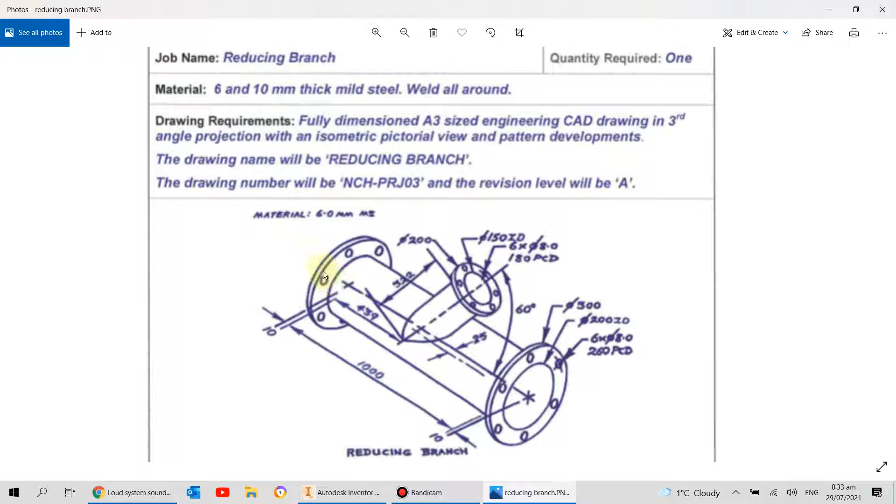And we have a little bit of an offset here of 25. So the way I'm going to start with this one, same as always, new sheet metal.

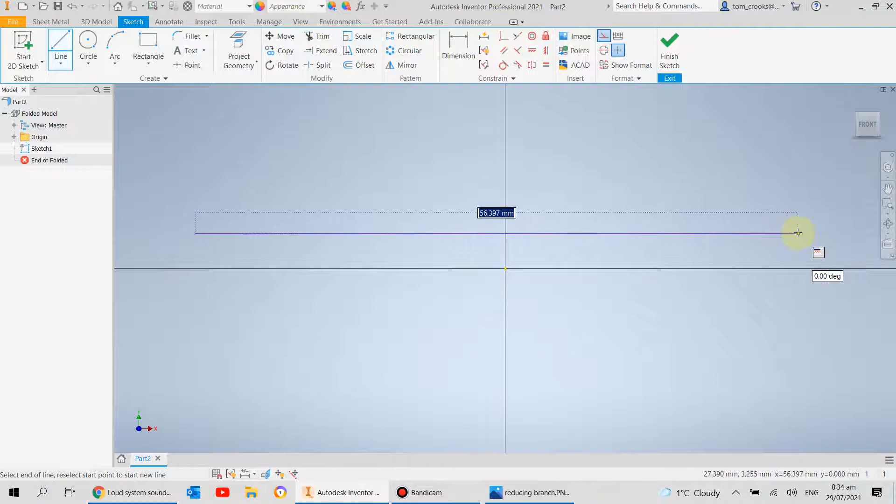I'm going to start a sketch and just draw a side profile of it out of construction lines. So I'll turn on construction line there and just draw a line here. I'm going to make sure it's vertical, and make sure it's horizontal to the origin point there.

Now I'm going to give it a length of 1,000, and I am also going to draw a line either side like this, and I'm just using this so I can do my planes off of them. I'm just going to make sure that construction lines are joined horizontally and vertically.

So you can see that's constrained to the middle there, it's gone black, and I'll just make sure this one's doing its job too. Yep. Now I'm just going to make these equal because they are the same size. And there's a basic side view - that's just the main length, and imagine an axis going up and down here.

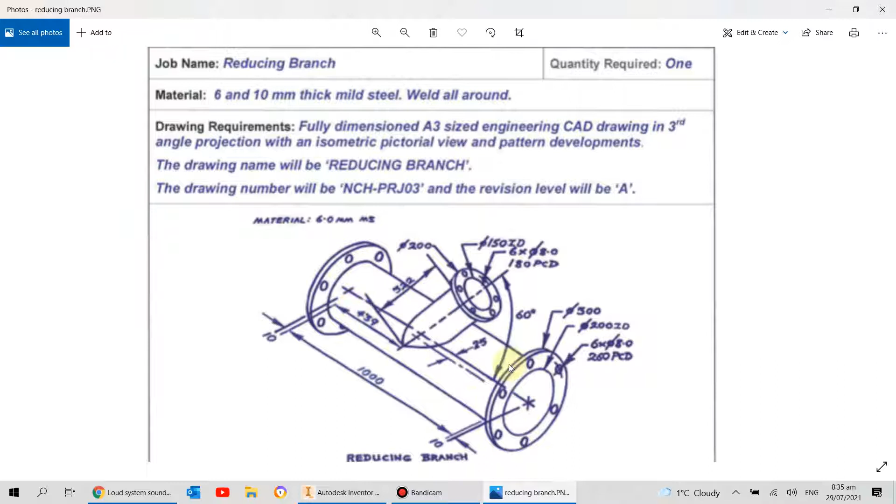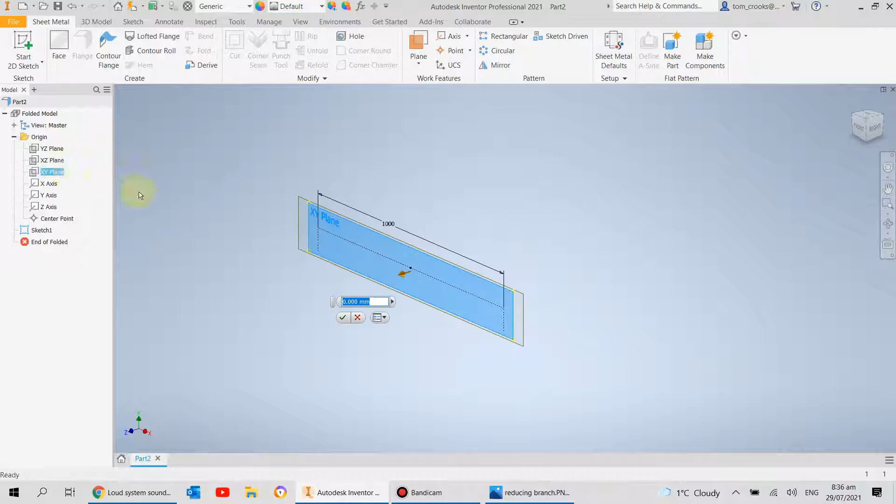Now I'm going to come off of that one a wee bit and make a new plane 25mm off the old one. So I'll go to new plane, offset from plane, find the one I drew on, that one there, 25mm.

Now I'm going to start a sketch on this, and I am going to project some of these geometries onto this face, so that one and that one. And we can see from the picture we've got a 60 degrees center line to center line, and the start is 439 off the end. So I will do a 60-degree line.

I'll just guess it for now - 439 it says, and 60 degrees. And we'll have another quick look at that, and the length we've got is 522. So we'll go 522.

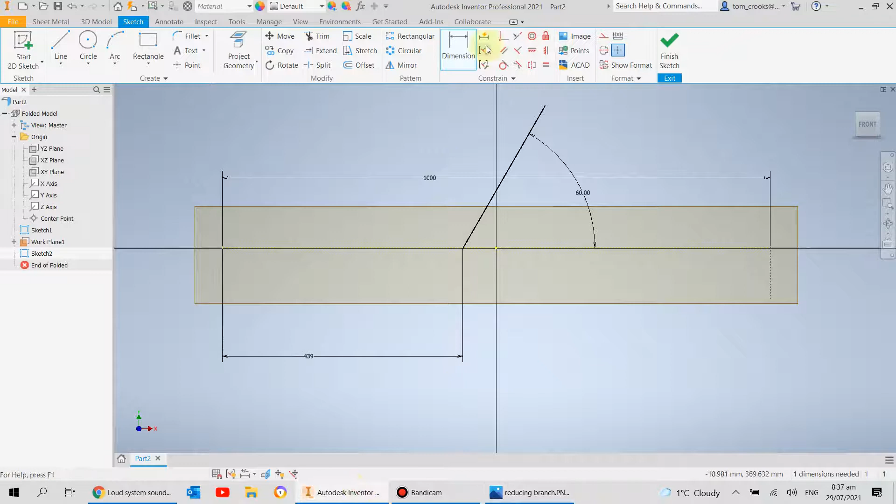Alright, and I can see I've drawn it as a solid line. I just want that as a center line, as a construction line. So what I'm going to do is click on it and just highlight the construction line there.

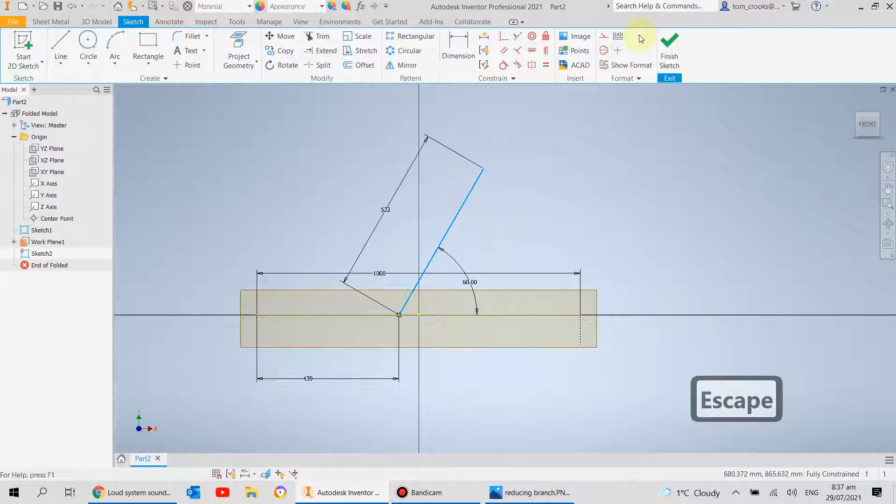And the next thing I'm going to do is draw a line across for the end of it here. And I'm going to constrain that to there. I'm going to make sure it's perpendicular to this one. And I'm going to dimension it as well. So I'll just check what dimension we had there - we had a 150 ID. So I'll just go with the ID.

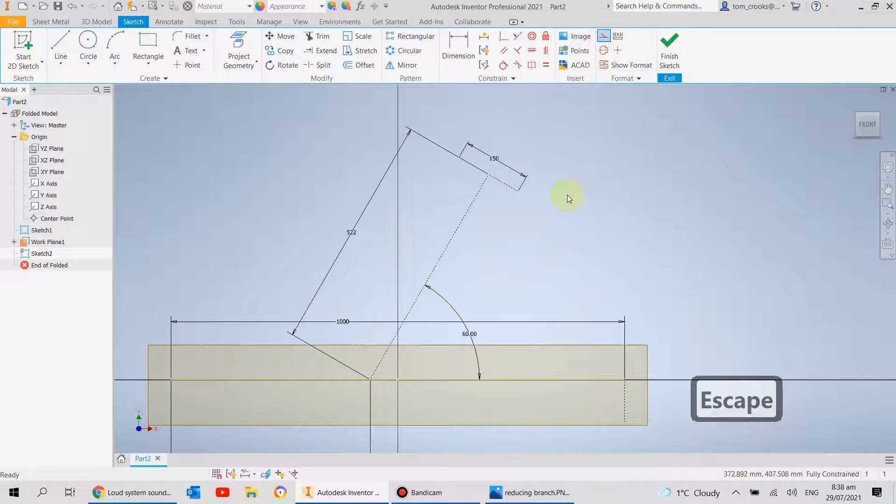And I've done the same thing again. I forgot to turn construction line on, so I'll just change that to construction. And there we go. So now I can build all my faces in the correct way.

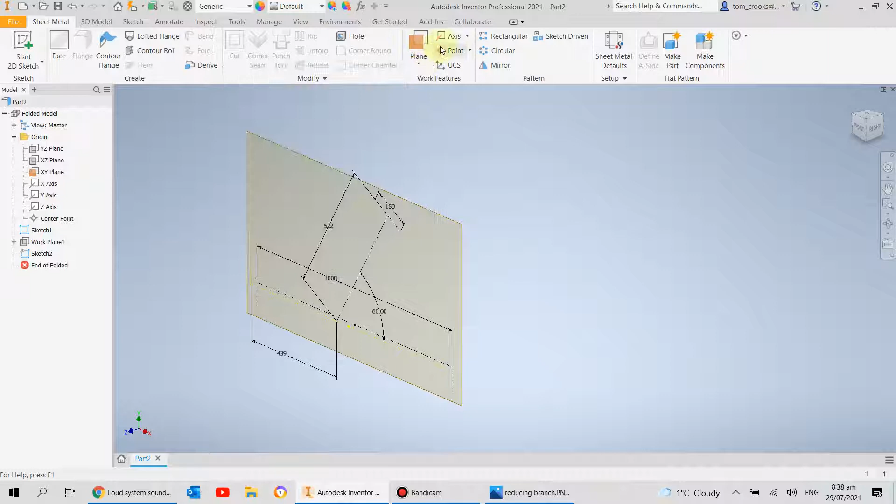So I'm going to turn this work plane off, and I'm going to turn the original one back on. So what I'm going to do here is just make a bunch of planes perpendicular to where I need, so I can draw on them. I'm just going to also make a few points, just to make my life a bit easier.

These may or may not come in handy. I may not use all of them, but it's always handy to have them there just in case I do need them.

One more thing I'm actually going to do - I've just realised I've forgotten to do it. I'm going to go back to that second sketch I did, and I'm going to edit that. And I'm just going to draw a construction line along the bottom as well. And I'll make sure that's constrained to the center, to the end of that line, center to the end. And I'll make sure it's equal to the top one. And I'll also just have a look, see what's going on there. And it must be parallel to that end one as well.

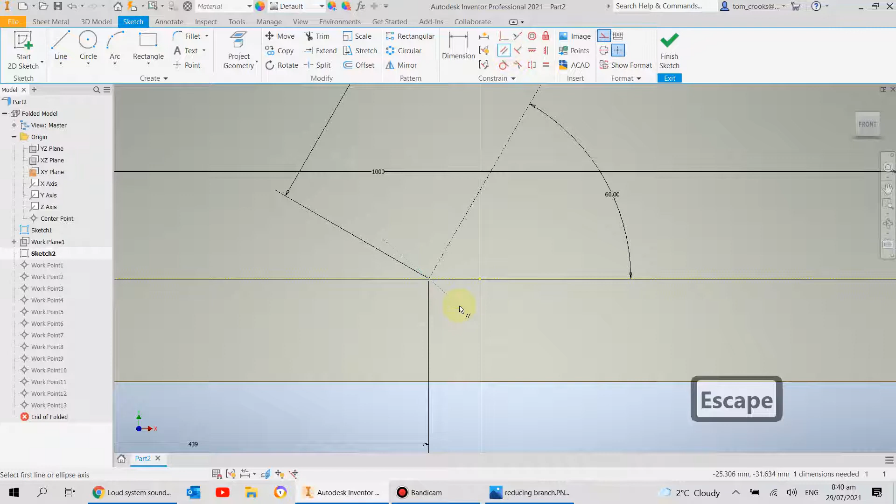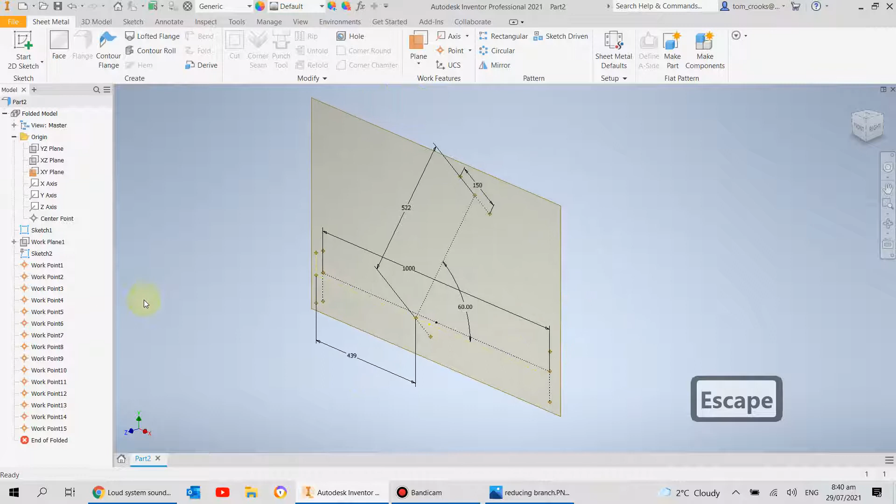Now I'll do a couple more points there just to make it easier when I need to do the other drawings. Right, I will turn off the plane here.

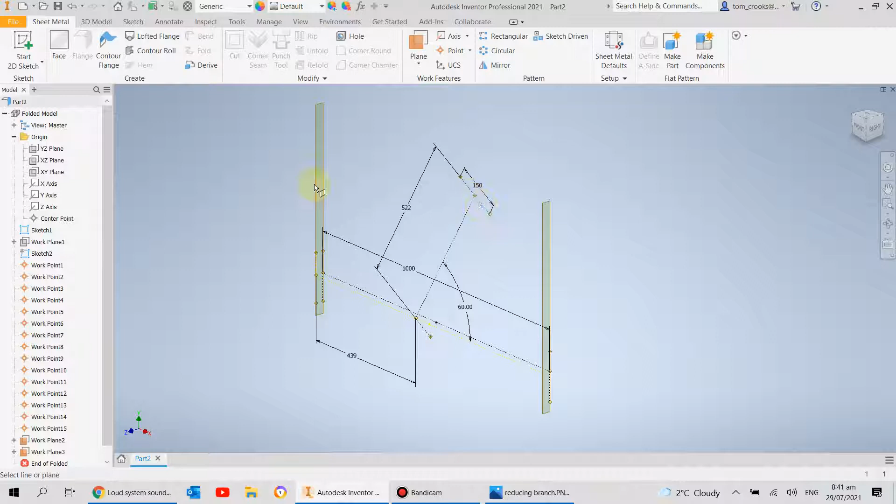Now I'm going to do a bunch of perpendicular planes, so I'm going to draw my faces on everything. So angle to plane around edge - I'm going to call that the edge. And angle to this plane, it should go 90 degrees automatically, which is great. Same again. Same again. And one more.

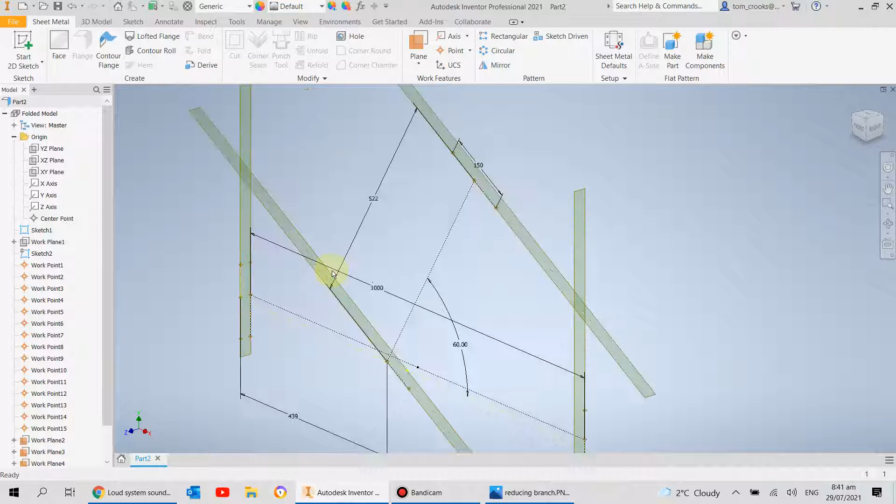So now I have all my planes that I'm going to need. What I'm going to do is draw circles on them. So I'll start a sketch up here, and I'll just rotate it a little bit, and I'll just project the geometry. So I'll project these points here, do a circle, and it's all gone black, so it's all constrained. Finish that sketch.

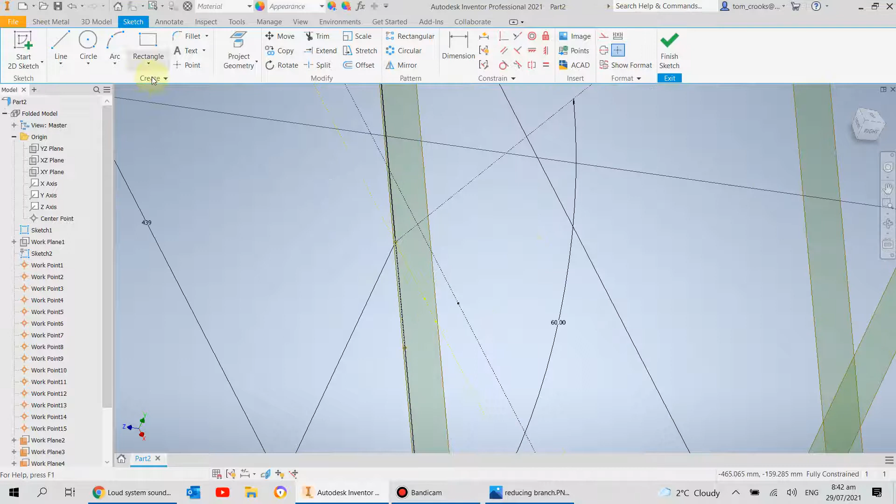I'll start a sketch on this one, and I'll just rotate it out the way a little bit. Same thing again, project the geometry. And there should be a line up here somewhere. There it is.

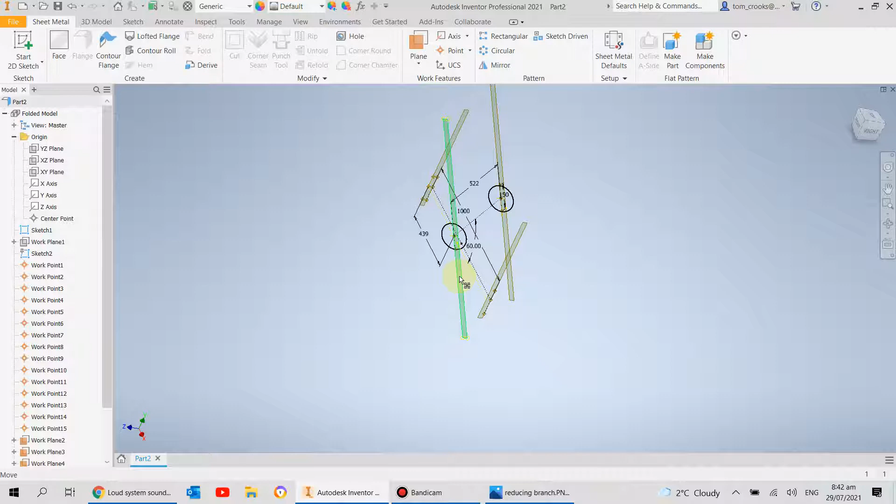So we had that's a 150 ID, that pipe that's coming off the side, and the other one is a 200 ID. So let me just do this, make sure we're getting everything right. Just rotate around a little bit. Same thing again. Project the center. Project either point, either end of that line there. And something doesn't quite look right about that.

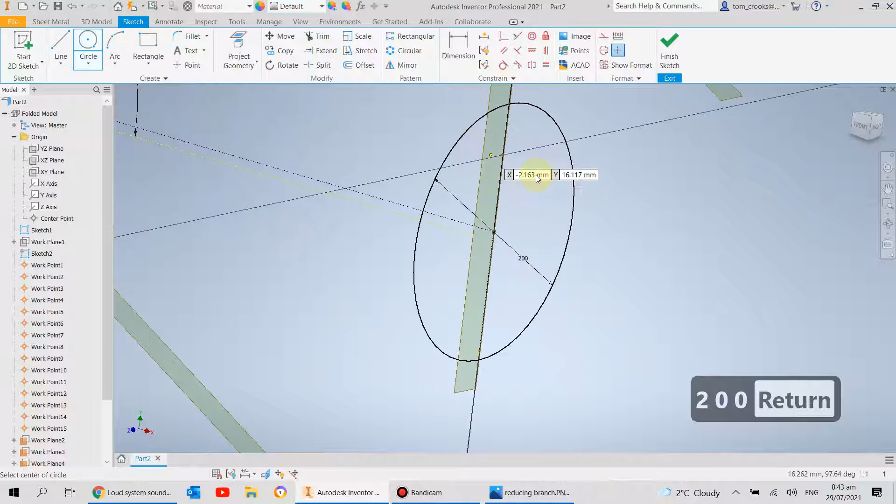I'm not too sure, but what I can do is I'll just draw a circle and give it a size. So we had 200, so this is all ID on the side. That's worked fine. For some reason this line isn't exactly where I was expecting it, but as long as the center's in the right place, that's good. And it must be, yep, so it's meeting there. I'll finish that sketch and I'll do one last sketch over here.

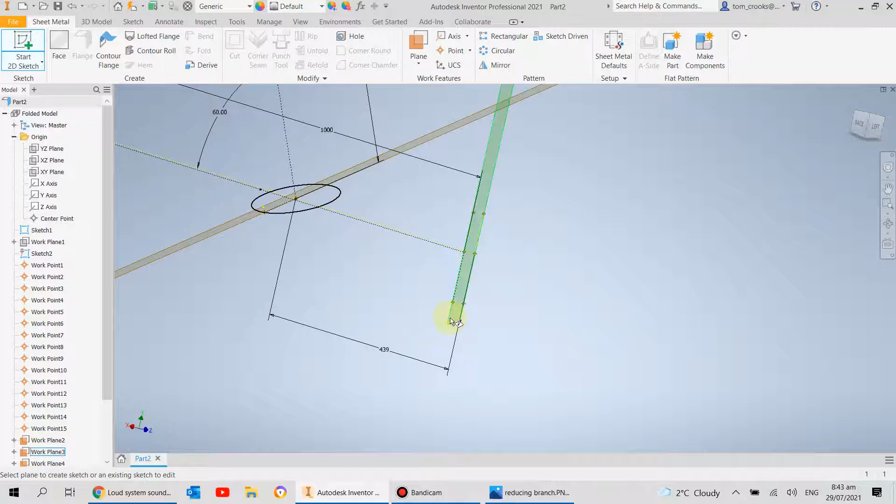I'm just going to rotate it a bit so I can see where I'm going. Got the center line there. I'll project that point and I'll just type in 200 here.

Right, so now I have all the faces of everything. So what I will do is I will actually go around and I'll just turn a few things off to make it a bit easier to see.

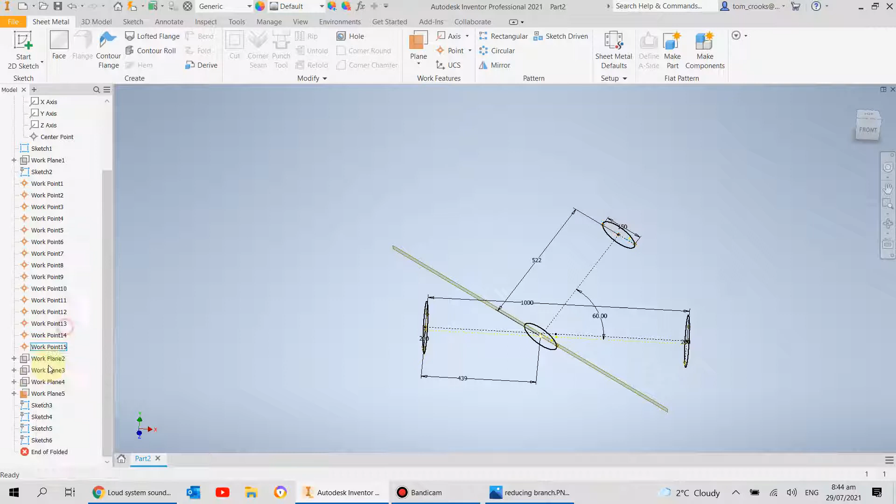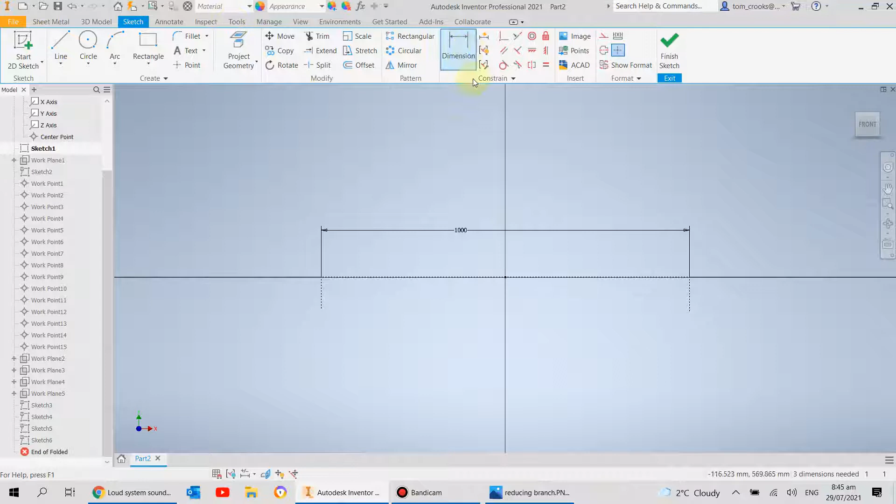Now I can see my points here. They're not quite where I wanted them. I may have forgotten to give that line a dimension. So I'm going to go back and edit the sketch and figure out why it's not really where I want it to be, which I can tell right now I haven't dimensioned it.

And it's not quite central. So I'm going to find the middle of that line and pull that up. Same here. And that makes a bit more sense. So you see all my work points will move with me. So there it is there. And there it is there.

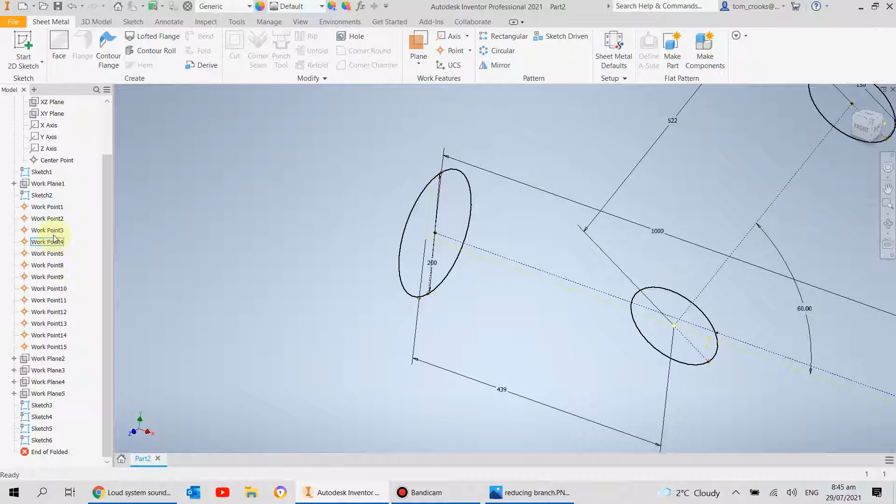These 3 work points I didn't actually want. So I'm just going to hover over there and find which ones they are. There's one, I'll delete that. There's another one. And I think that's the last one I don't want.

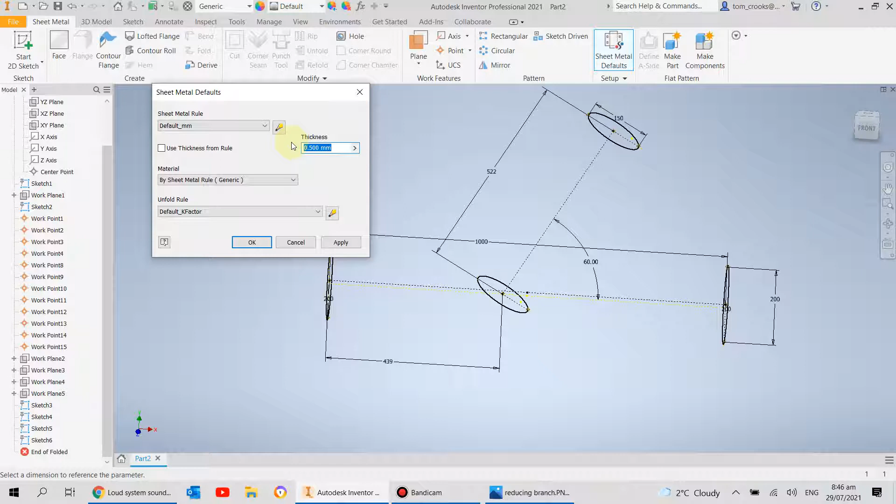Right, so we've got all the faces of everything here. So what I'm going to do is I'm going to go up to the sheet metal defaults and I am going to untick this, and I believe it said 6mm. I'll just quickly check that. 6mm. What I'll do is I'll save this as a, I'll call it a skeleton.

So, 2 main parts I need to make for this one. Remembering these are all ID, so what I'm going to do here is I'm going to do a lofted flange from here to here. We're going to go smooth format and make sure it goes to the outside because we're talking about inside diameters this time. So that's looking good. Go OK.

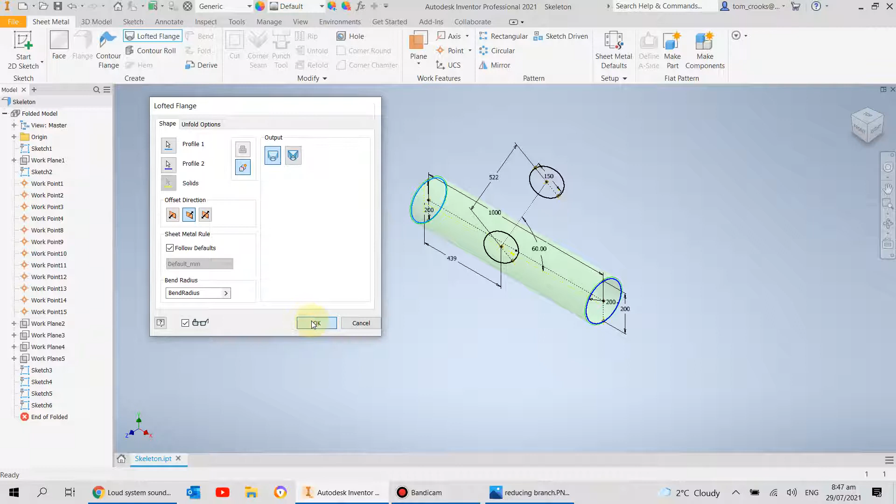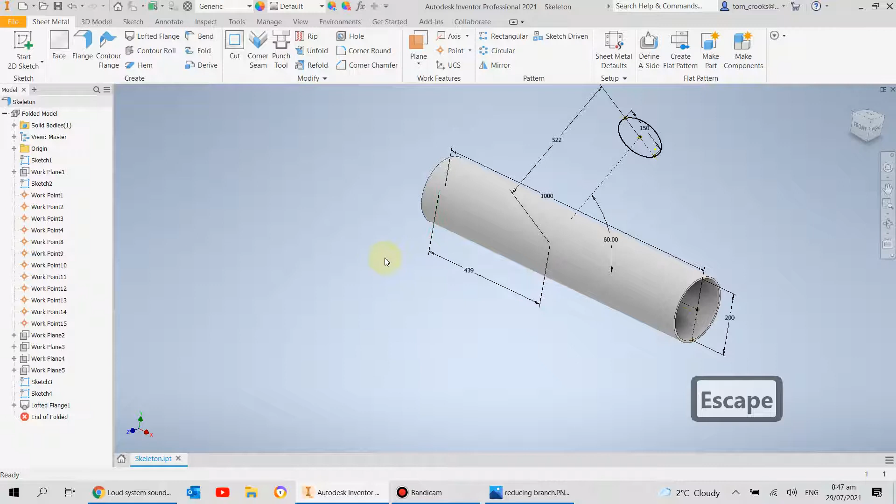And this one I am going to tell it to cut. And I'll see if I can pick up on that sketch. Tell it where to cut to. So no, I can't. So what I'll just back out of there a wee bit and I'll turn on the plane that the sketch is on. That one there. I'll come up to cut and I will get it to.

Now that I think about it, just need to do one more thing. So I'm going to go up to the sketch, find out where it is. Actually, no, I don't need to. I was just thinking about the thickness there, but that's fine. And we'll go to... so there we go. We've cut to that plane there, and that's our hole. Right, so now I'll just turn a few things off.

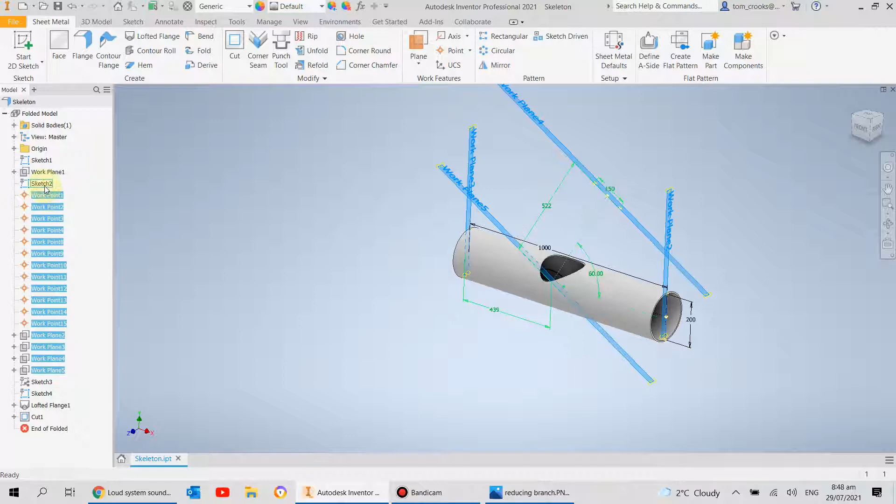Turn all these off. Most of these off, I do want one on the end. I'll keep work point 10 on. I'll just go around and turn everything off to make it easier to see.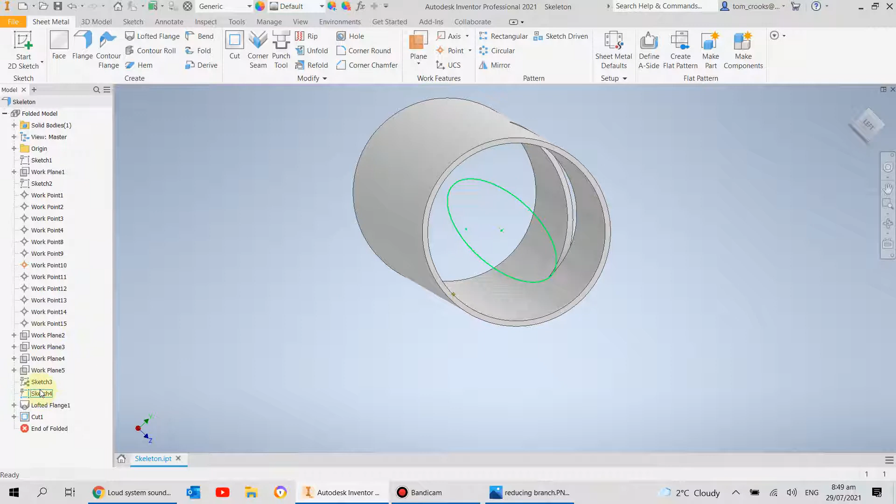So what I'm going to do is rotate this around. Still got some things on here, so I'll turn these off quickly. Now see how this point's on the inside, so I want it on the outside.

So what I'll do is just start a sketch here and project the geometry of the outside. I'll do a line and make it a construction line, just there to the center. That's fine. And I'll put a point on the outside there. So if I hover around the outside, it sort of picks up on that point there.

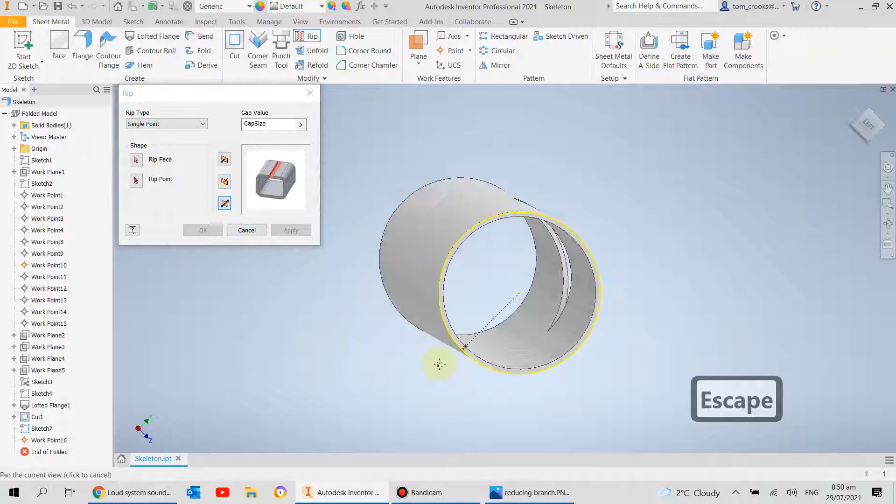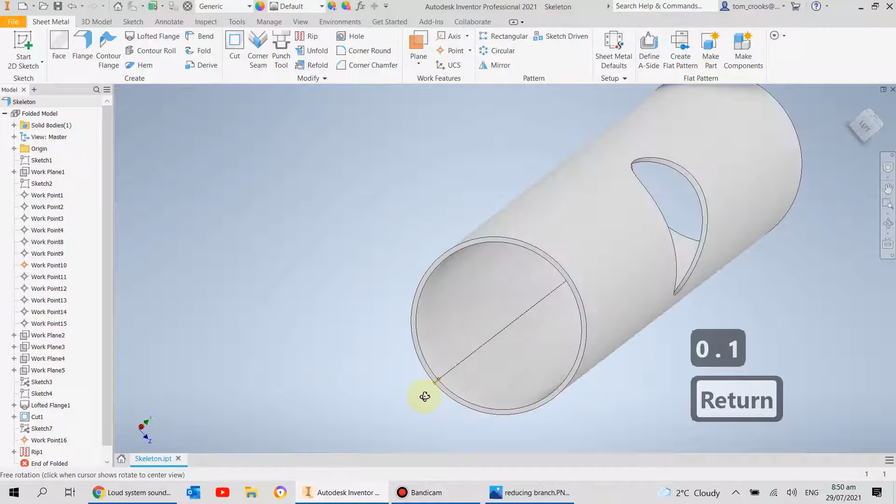Now what I can do is put a rip. So I've decided the seam's going to go along the bottom, so it'll be a full length weld there. It doesn't say anything otherwise on the drawing as far as I can tell. So grab that outside and that point there. And once again, 0.1, just to make it a little tiny split, so it's not a big gap that we have to fill with weld or whatever.

Turn off these work points and all other things I don't need, so I've just got to find where they are. There's work point 10. So I think everything's turned off now. Let's collapse that up. Go create a flat pattern, and there's our flat pattern.

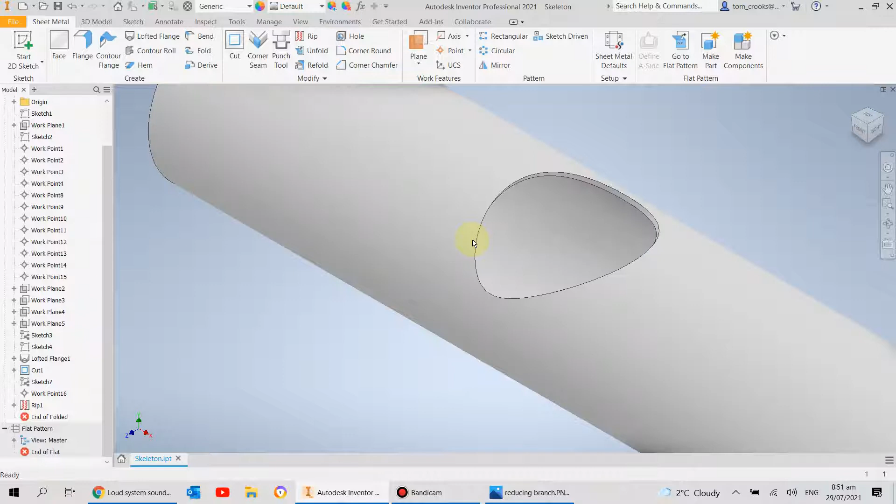So this hole in this pipe here, that's a 150 diameter ID going into it. I've just done that with the assumption that the branch will sit on top of it and be welded around the outside. You could have done it 162 into there, then the branch could have come in and been welded in there. Doesn't really matter, that's just how I've interpreted the drawing.

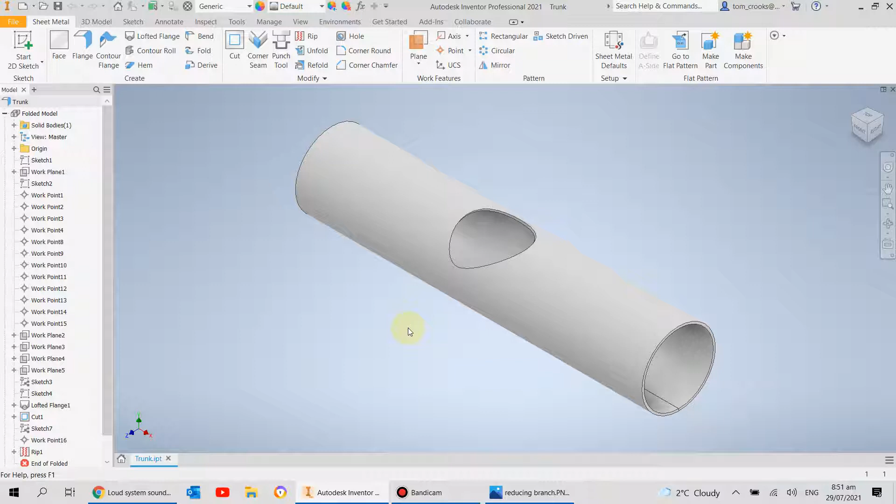So I'll save this as the trunk. So we've got the trunk there. Right, I'm just going to collapse that, close this, and open the skeleton up again.

Now I'm going to do the branch. So I'll come to lofted flange, and smooth output to the outside, as we're talking about IDs here.

Now, what I have to do here is remember I have done the hole as ID, so I need to actually cut this shape right across the OD of this bottom bit.

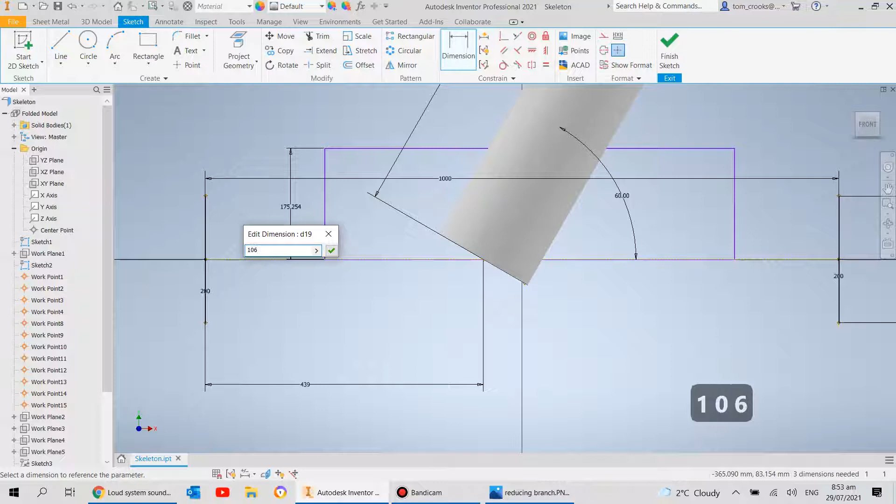So what I'm going to do here is just do a new sketch on that original plane, and I don't need to get too carried away here. All I need to do is draw a rectangle, and I'll give it the dimension of the main branch. The main pipe is 200 plus 6 mil, so half of that will be 106, as it should be 212, counting the metal thicknesses here.

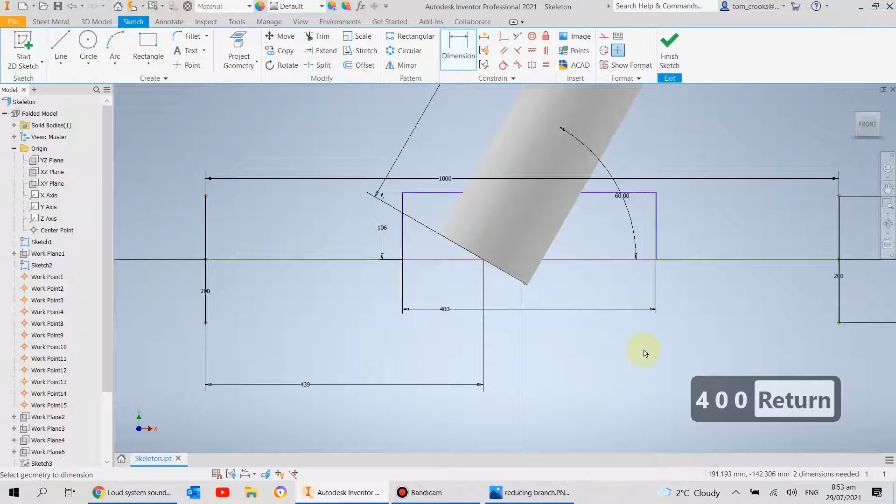And I'm just going to vertically constrain that to this point here. Give this a dimension, this really doesn't matter, I don't have to draw the whole pipe. You can see it says still 2 dimensions needed, so let's have a quick look. So it doesn't know that it's supposed to be horizontal yet.

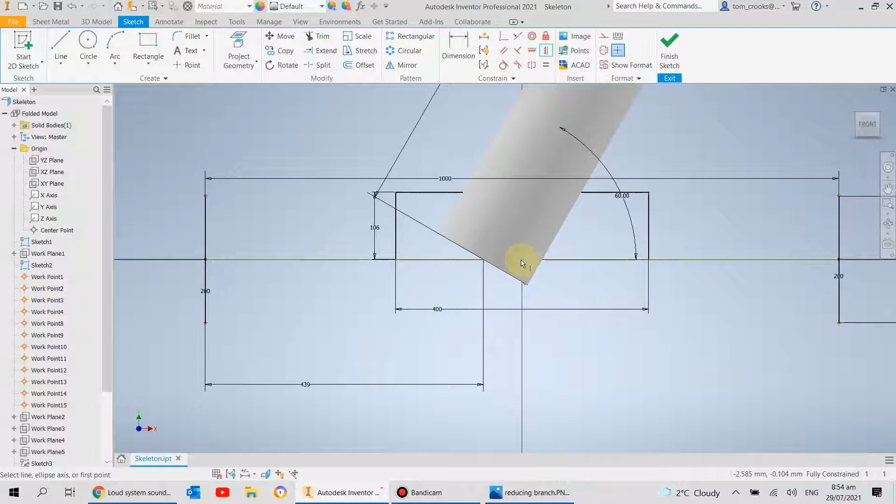So I'll grab a horizontal constraint, grab that horizontal again, go there to that origin point, and we'll go vertical to the origin point as well. Right, so I'll finish that off.

Now I'm just going to go into 3D model, just going to do a revolve. So where the pipe was going to be, I'll select that profile. It's already gone over to axis, select that bottom part there as axis. And I'm going to do that as a cut, just like that.

So now we have that shape sorted. I'm just going to go turn off a whole bunch of points and stuff here, tidy it up a little bit, and turn off these sketches.

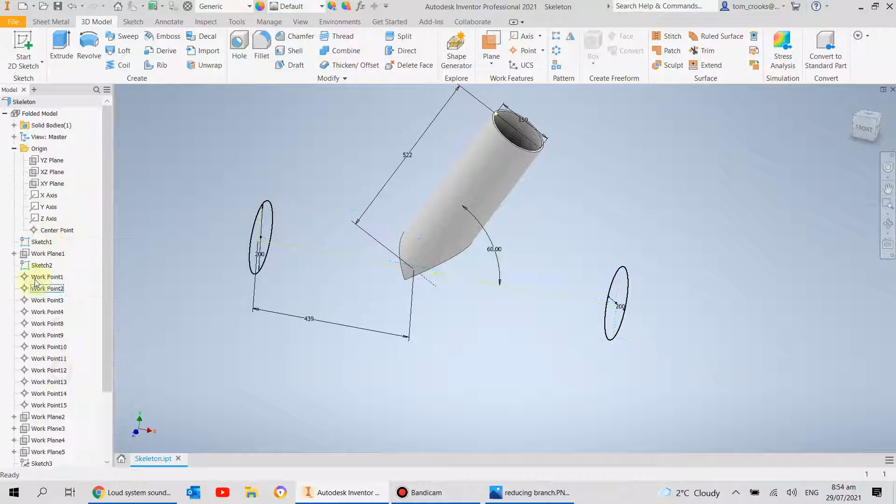And I'm just going to do a new sketch on the end here. Now this is just me deciding where I'm going to put my seam, so I'll project the geometry, and I think the seam would be best on the short side of it, just a bit less welding. So draw a line, make sure it's a construction line, there to the outside. Finish that off.

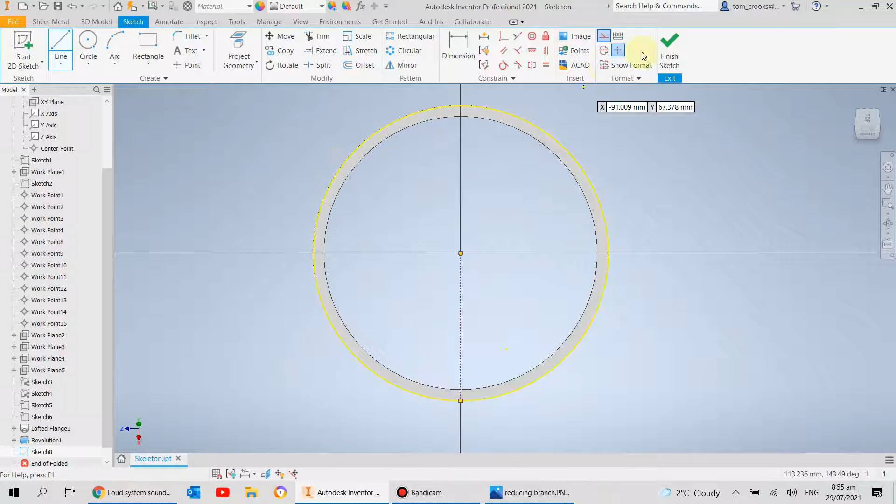And I'll put a point on there. I'll zoom in a wee bit so you can see it. Very hard to see, but it does pick up on that very lightly.

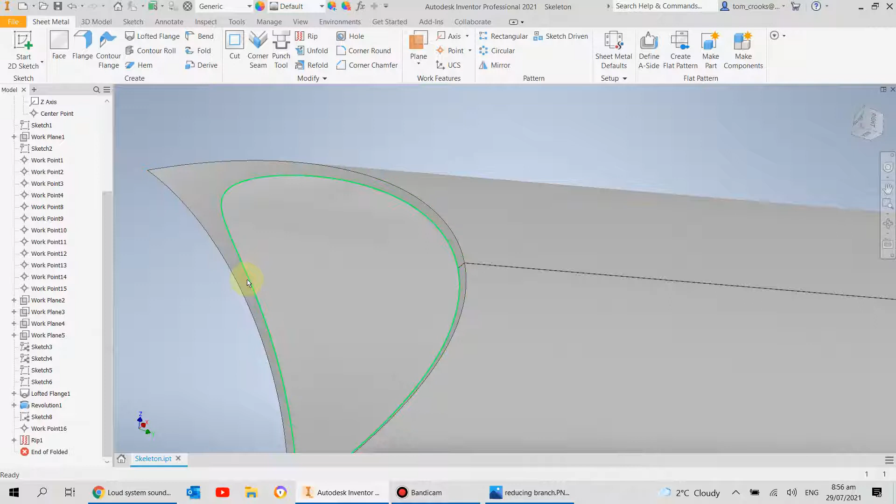Now I'll go back to the sheet metal space and rip this. Once again 0.1, so it's just a tiny wee gap. And I'll just make sure I've turned everything off but the actual thing itself. So there we have this bit. You can see from the bottom that shape there will perfectly match the top cutout on the other piece.

So let's go back to home view, and before we exit we'll create a flat pattern. So it's an interesting flat pattern, that's good. I'm just going to collapse everything down, and I'll make sure I save this as the branch.

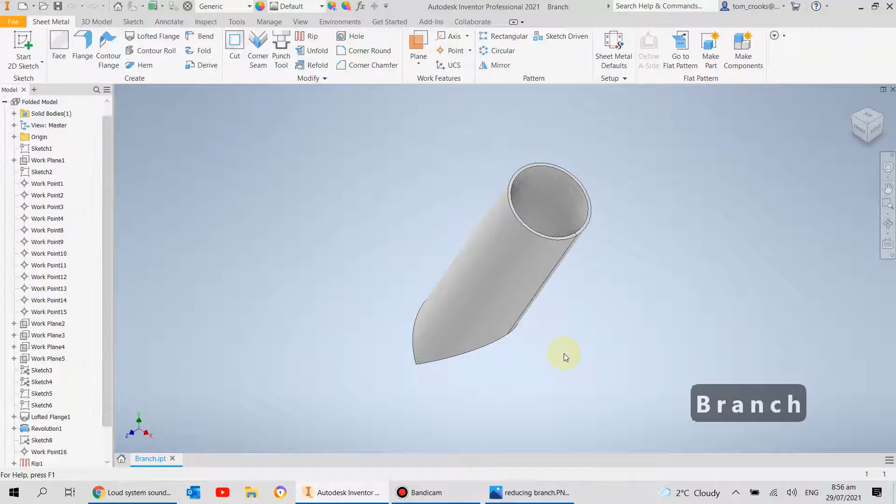Now what we've got left to do is draw some flanges. So close out of this again, and I will go to the skeleton. One thing I've got to do is all these flanges are 10 mil, so I'm going to change this from 6 to 10.

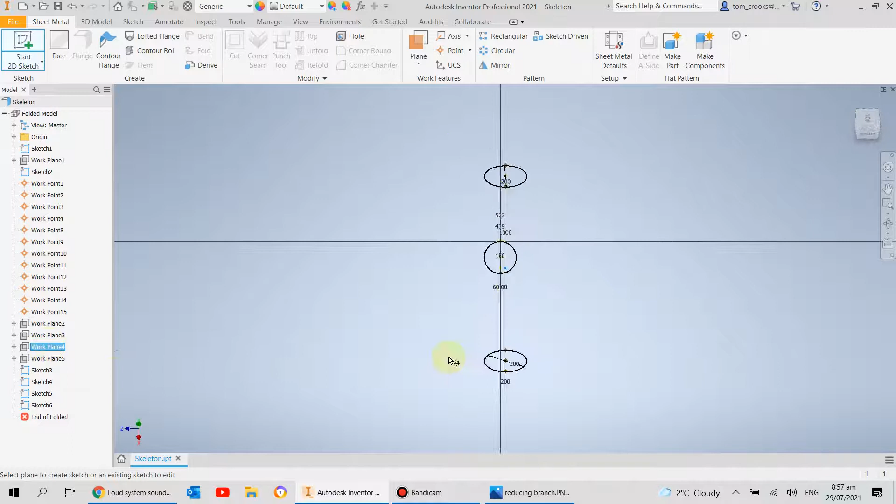Now what I'm going to do here is start a sketch, and I'm going to find the planes that these spigots I've drawn are on. So there's that one. I'm going to draw...

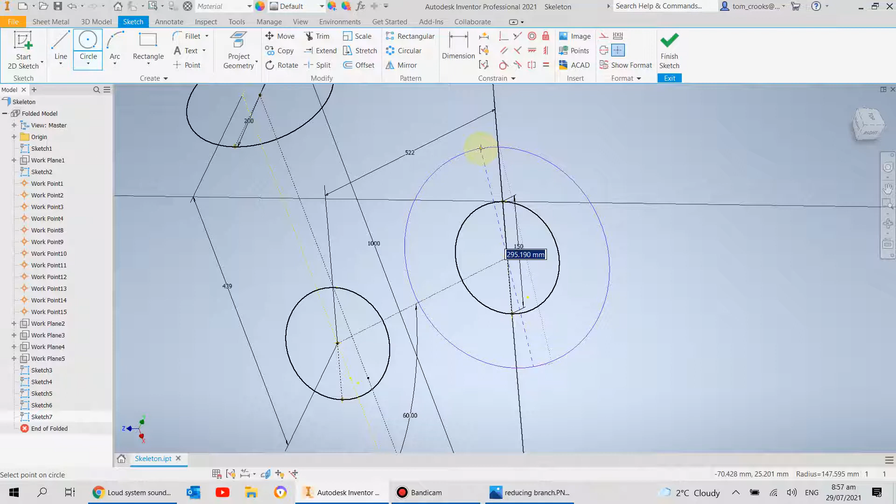I'm going to project the point here, and I'm going to draw a circle. We've got on the drawing it's a 200 OD, so I'll go 200, and it's got a 150 ID, so I'll just put that back in where it was, 150, and I'll finish that and turn that into a face.

So I want it to come upwards, so that's going the wrong way. Take it around the other way, apply, and close out of that. So right now I'm just going to do a bit of tidying up, there's a bit too much going on, it's a bit confusing to look at.

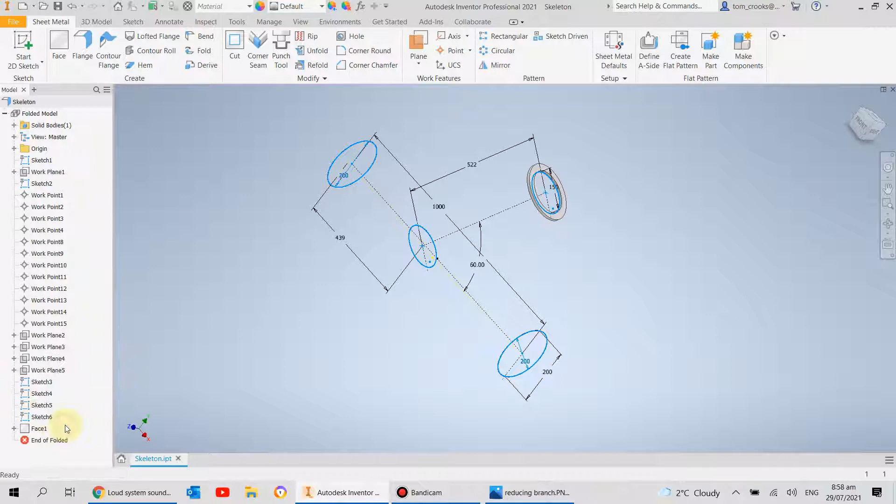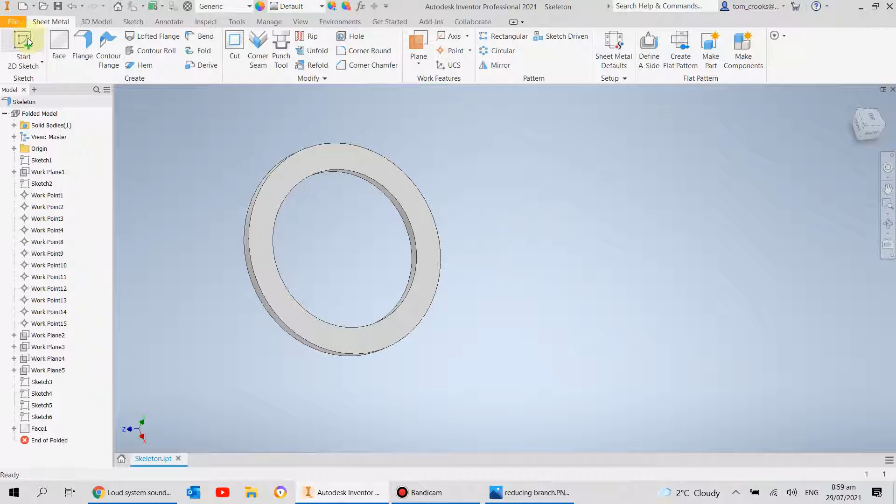So there's our flange here, and we've got 6, 8mm holes at a PCD of 180. So I'm going to start a sketch on this, and I'm just going to draw one hole. I'm going to draw it vertically. So I'll just check this.

Oops, I just got to project the geometry of the circle here. Now I'll draw it vertically to the circle, so vertical. So that's not what I wanted, so I'll go back horizontal, so it's round on its side. So I'll go horizontal, and 180 PCD, so half of that is 90. The diameter is 8, and I'll finish it there.

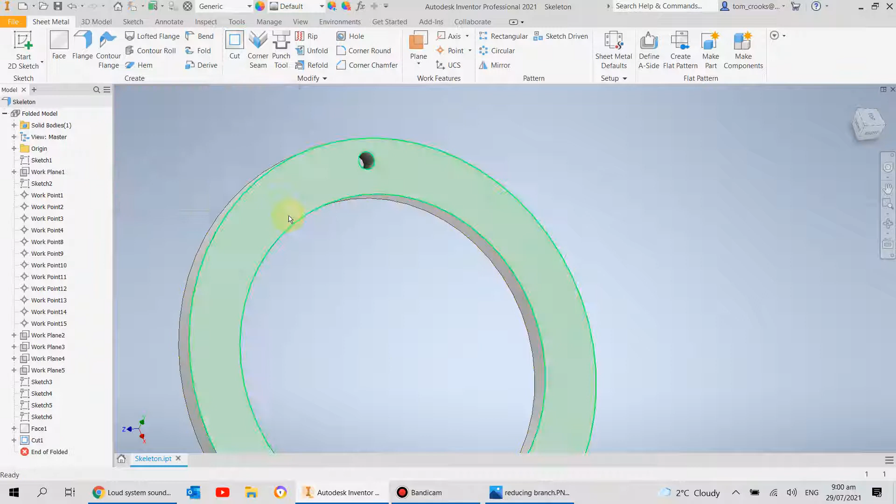Now what I'm going to do is go cut that hole, just like that, and I'll do a circular pattern of that hole. And it's already come up with 6, so it should work out perfectly.

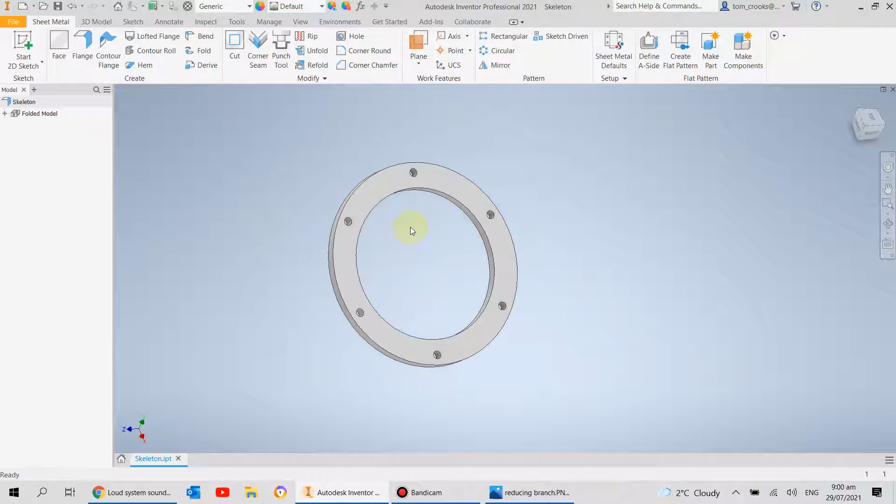So there's the flange. If I collapse everything there, here it is. So it's already a flat pattern as it is by itself. What you could possibly do with this one is when you go to plot it on the paper space, because it's in the orientation of the entire branch, it's not going to be easy to put an easy view on it.

So I would just do this, say to start a new sketch, and then set current view as top. So that's now the top view. Just go finish sketch, so I haven't drawn anything. I will just delete that one because it's not doing anything, I just used that to bring that face the right way around.

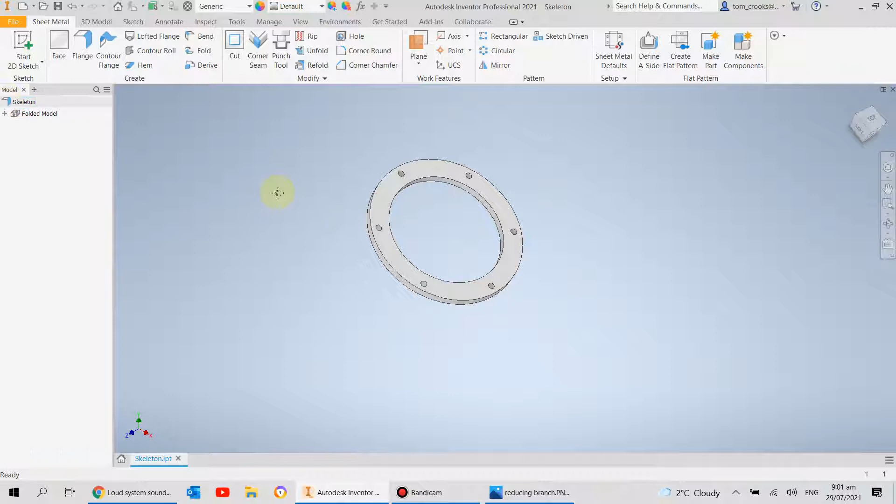So we have the spigot there, the flange. So I'll save that as a small flange, possibly. Sounds good.

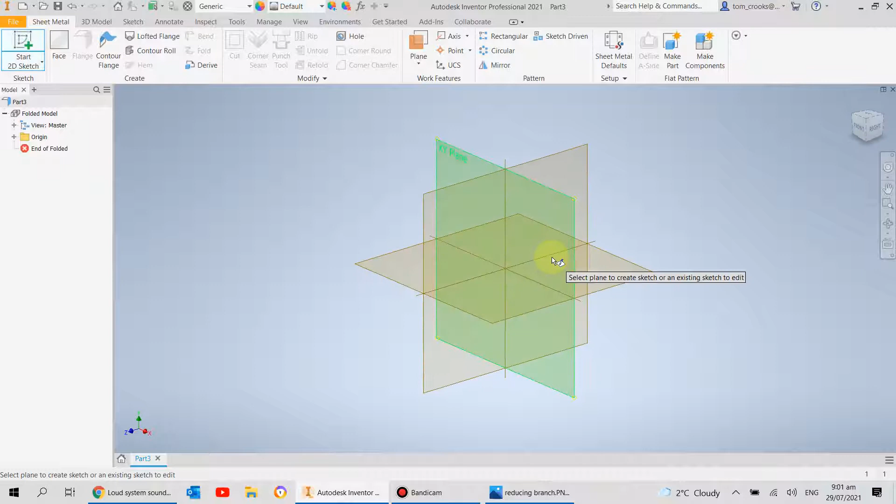Now, what I'm going to do is slightly different for the last bit. I am going to draw a new, and I'll do a sheet metal. So now I'm looking at the end flange, so I'm going to draw a sketch on any old plane, draw a circle.

So we have what looks to be a 300 OD flange, if I look at the drawing. And inside is going to be that 200. So I'm just assuming the pipe and the branch sitting on top of this and then welded on top.

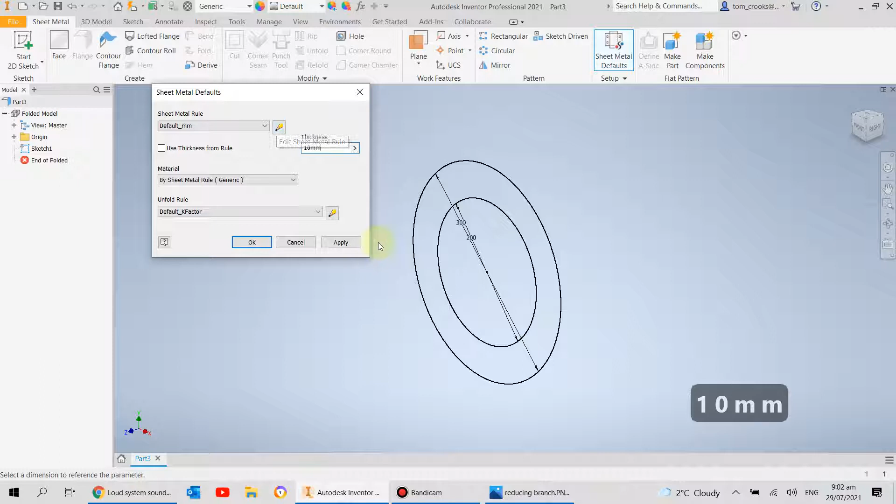So I'll finish that. I'll come up to sheet metal defaults here, and I will put in 10 millimeters. And then I'll turn this into a face. It doesn't really matter which way it goes. Close that.

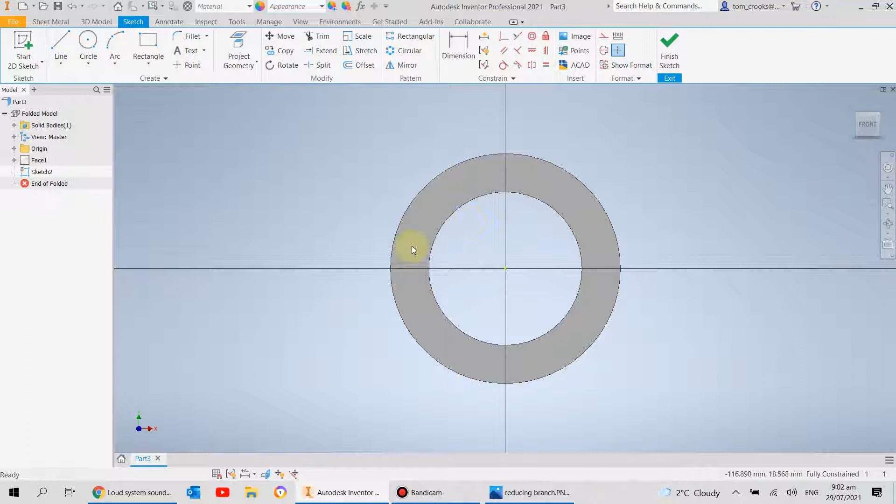Now I'll just draw one hole, so I'll start another sketch on here. So I could have drawn the holes in on the original sketch, it wouldn't have really mattered what way I'd done it. This is probably the slightly slower way, but it's just what I'm doing at the moment.

Right, so I'm going to make sure that the center of that is vertical, and the PCD of this one is, looking at the drawing, a 260 PCD, so I'll go 130. And the hole size is an 8mm, so 8.

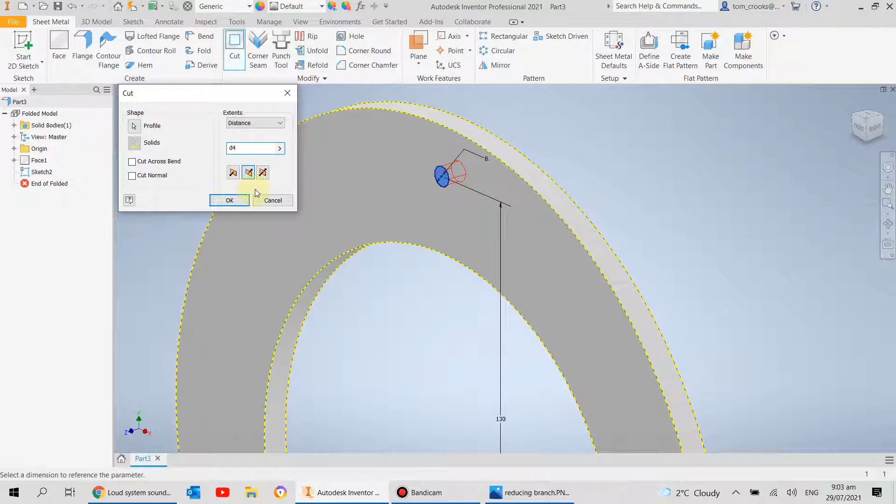Finish that sketch there, and I will cut one hole out. Just back up there, I touched something by mistake. Yep, zoom in, cut, okay.

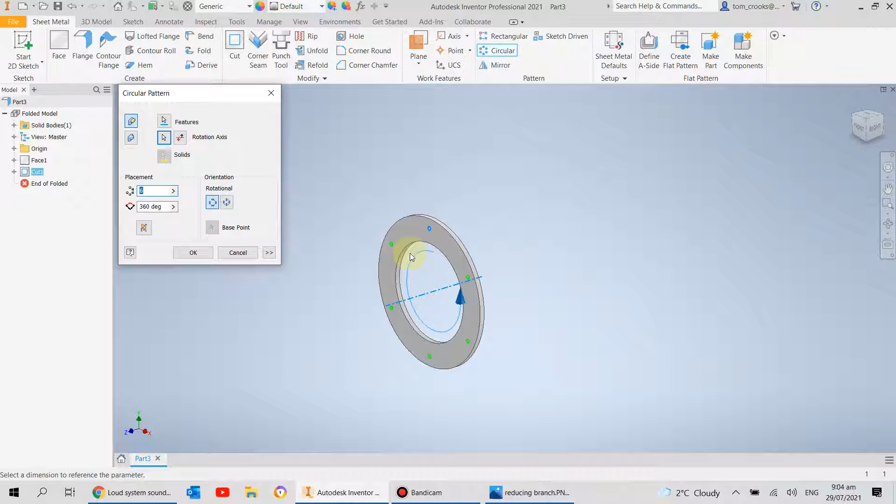Now I'm going to circular pattern that, so I'll go here, around this here, and we have 6 holes again, so it's picked up on 6. There we go, so we've got the end flange. So there's going to be 2 of these. I'll call it large flange.

Righto, so I'll close out of that. Now we just come to the assembly. So, new assembly file.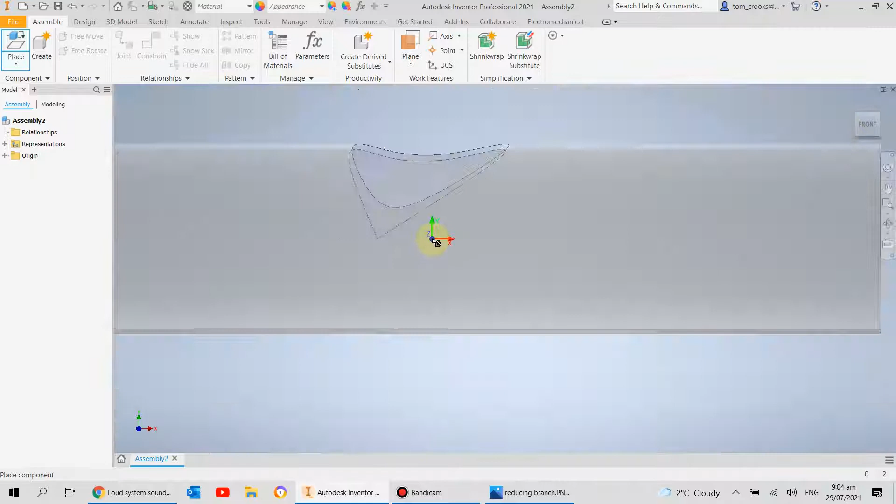I will place the main tube, the trunk as I've called it. And I will come over here and put the visual style to shaded with edges to make things a bit easier to see.

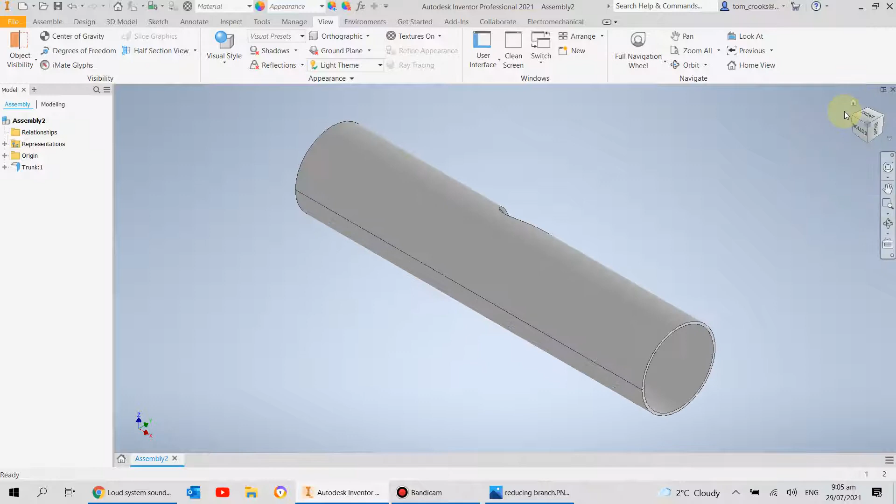So that's our home view currently. I'm just going to rotate it around and pick the same view as what we've got on the Competenz drawing, so we've got this view here. I'll right click this home symbol. Oh, it moved on me. Let's do that again. I'll right click up at this home one, and I will set current view as home, fit to view.

Now, we've got the origin of the assembly space and the origin of the trunk. So I'm going to go to assemble, constrain, and I'm going to flush constrain those two origins together. So YZ to YZ, XZ to XZ, XY to XY.

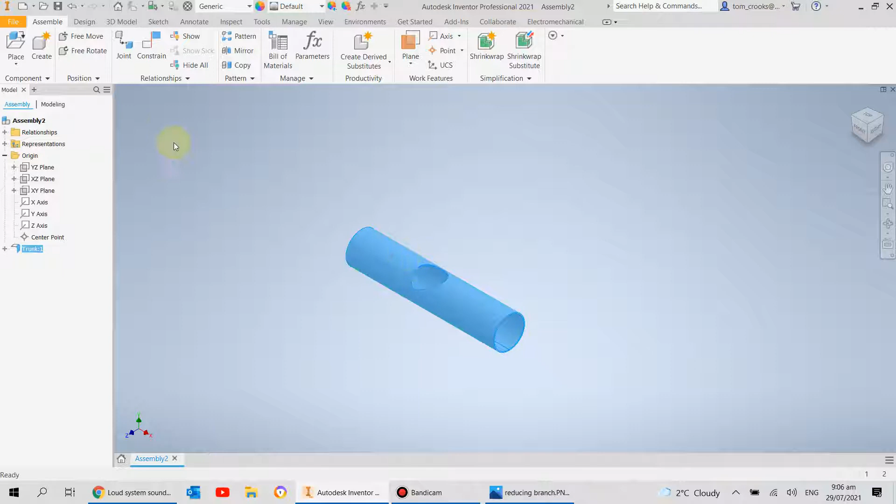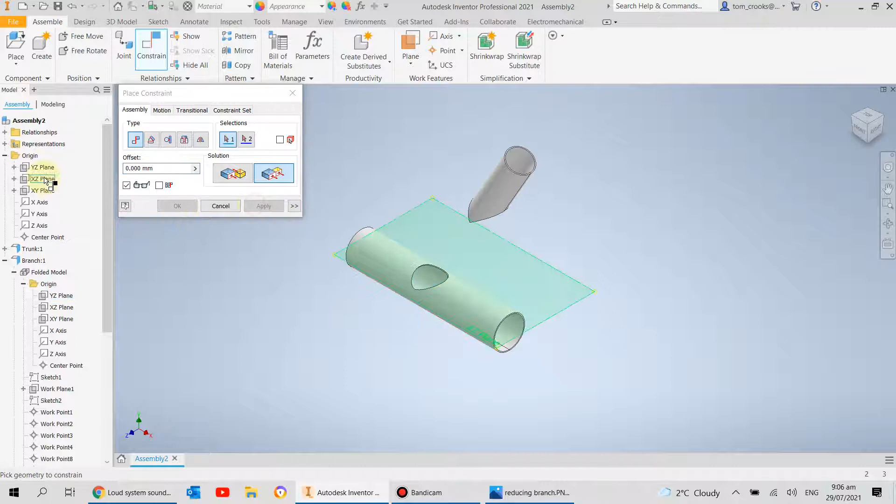I'll minimize the trunk now, so it's not moving anywhere if I try and drag it. Now I'll place the branch in there, and I'll just expand the origin of the branch. Do the same thing, flush constraint. And just collapse everything in there.

Now time to put the flanges on, so I'll place the small flange. I have drawn the small flange with all the origins the same as the original drawing, so I'm just going to constrain that with origins. I'll go YZ to YZ, flush of course, XZ, XY.

Right, so the flange is just sitting on the end there, which is good.

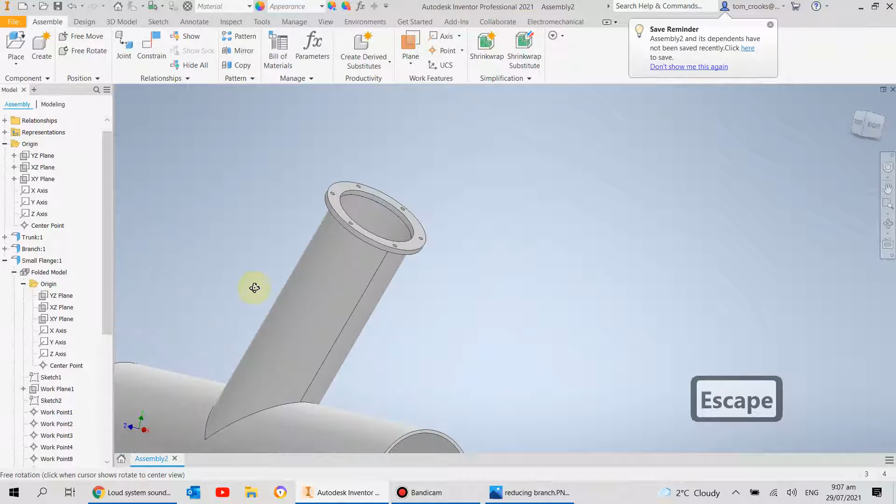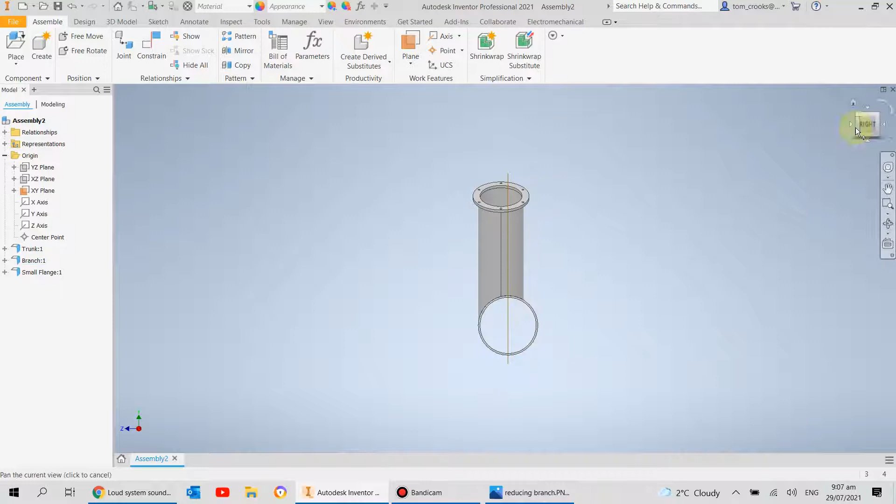Now, I'm going to do something slightly different to how I've been doing it so far. This is just a bit of exercise in learning how to use your constraints. So I'm going to turn this plane on. As you can see, it's down the middle of the trunk there. And I am going to place the large flange, so I'll put one there and one over there.

So the first thing I'm going to do is constrain the face to the face as a mate, not flush. Then I'm going to constrain it along the axes, like so. And I'm going to back out a little bit, and check what one I've got, large flange 1.

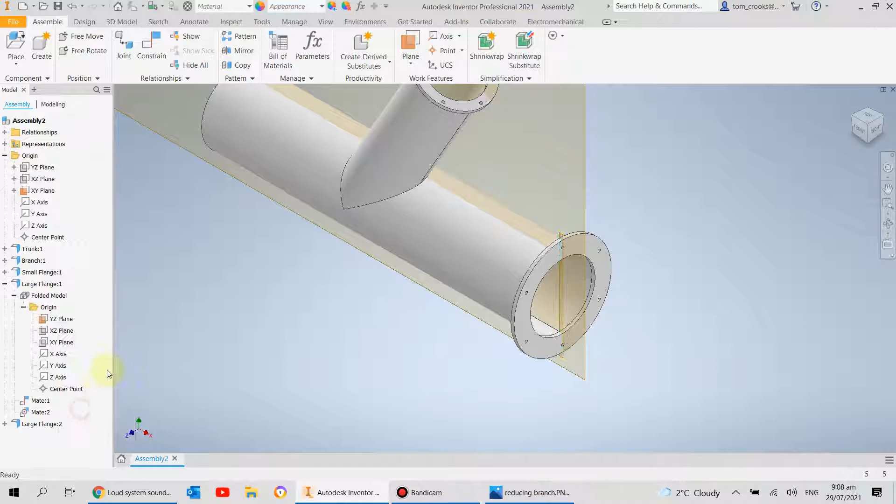I'm going to turn on the YZ plane on this one, and all I'm going to do is constrain that to that as a flush. Now it can't rotate. So then I'll come back, turn that back off, and do the same thing on the other end.

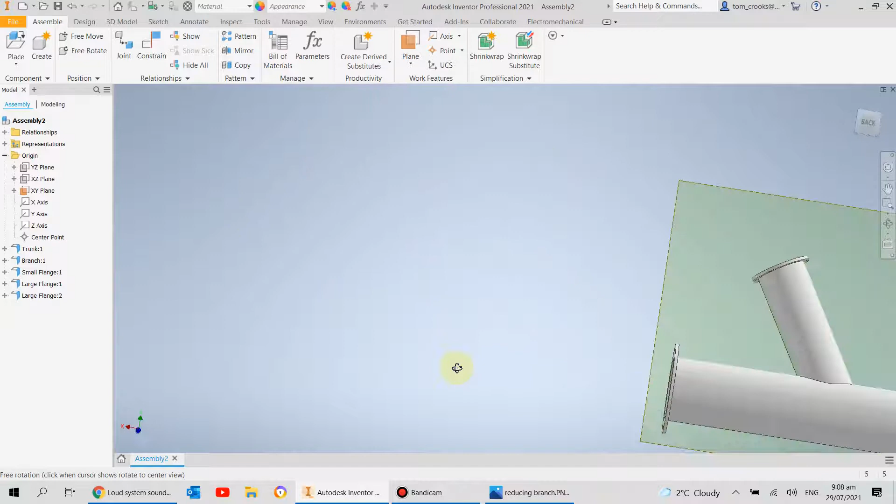So rotate that around. We're going to constrain that face to the axis of this, along the axis of this. I'll turn the origin plane on, so we'll constrain that to this. I'll go flush, apply. So now it's all joined together.

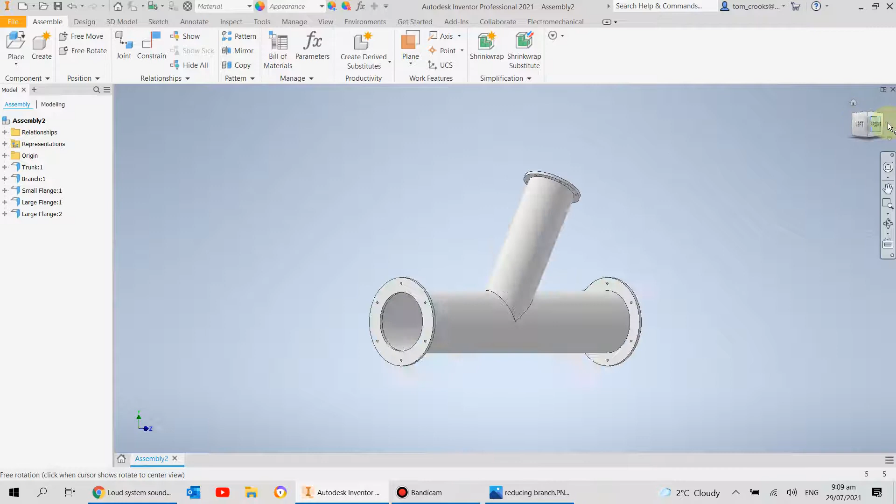I just need to go around, turn a few things off, collapse a few things, and home view. So there's home view, there's your front view, etc. So it's where I want it to be. I'll just have a quick look at it.

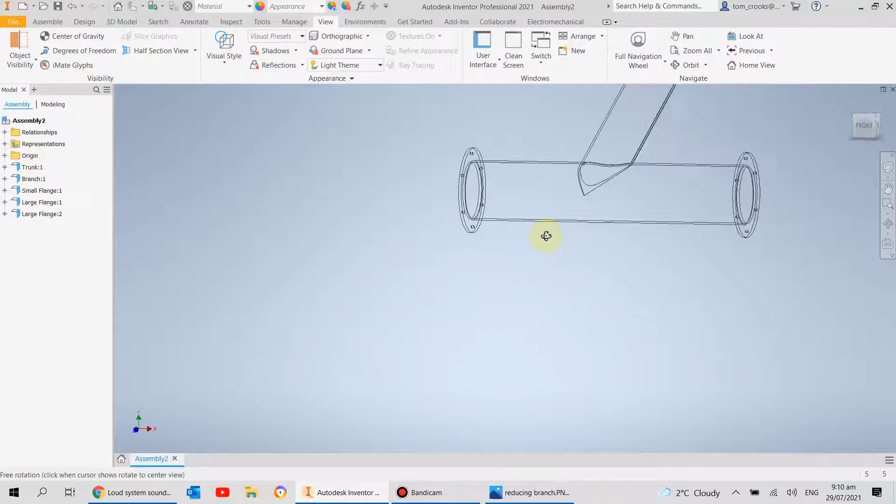I'll go over to view here and put it into wireframe. So now you can see the flange just butts onto the end there. Same here, it's butting onto the end, and you can see how this thing mates. So that's the actual hole, that in bit, and the other bit's just sitting on top, so you'd weld around there.

Right, so I'll save that one. We'll call this it's the reducing branch, isn't it?

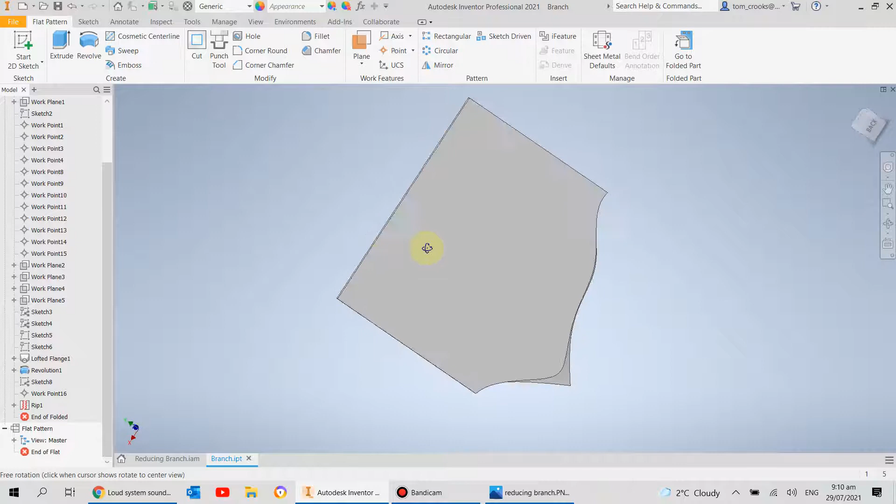And see how the view's gone back again. Another thing to note is if you do need the patterns as DXF, I'll double click this bit, go to the flat pattern, and you can see how it's slightly different either side. So you'd need to grind it, potentially, if you were going to fit that on there.

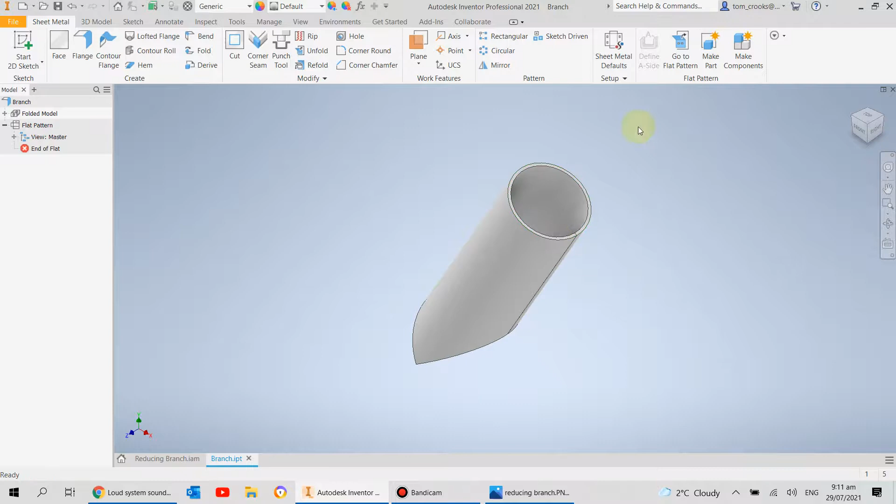But we can just grab this pattern, right click it, and export face as. And here we can save as a DXF, so that'll save that face as a DXF, so that's what we want. I'm just going to collapse everything under here, and save it. And that's it, so that's the reducing branch.